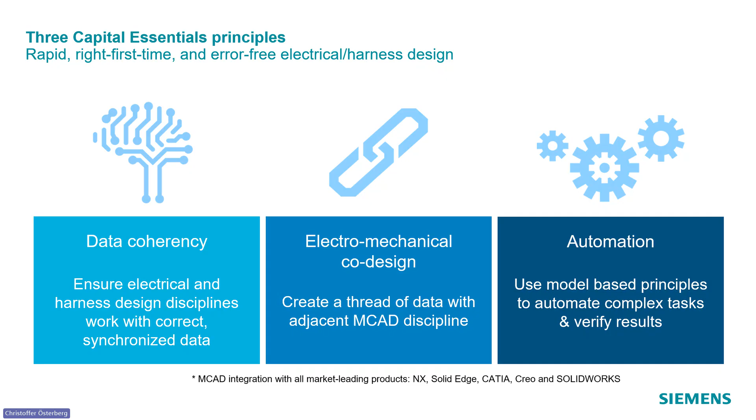And also, the digital environment allows you to automate certain tasks that you normally did manually. You can create a model to automate a large part of the design flow.

You can already start synchronizing this to the MCAD environment, transferring the data there. You can also sync this to the harness design. So these three parts are really working in parallel.

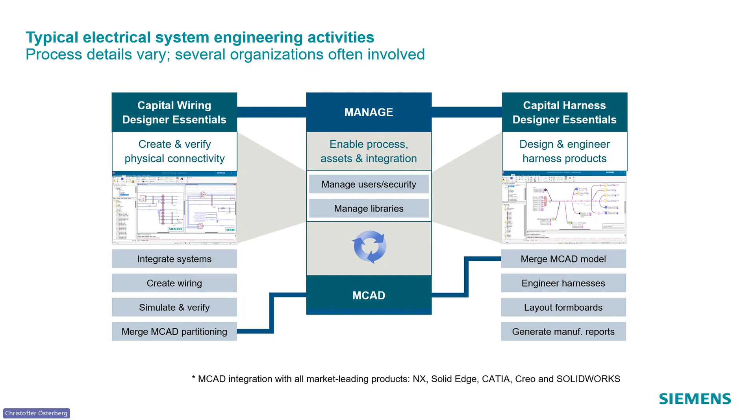The good thing is you can start with a rough estimate of how the design will look, and you can already synchronize it through the 3D design. Here you also add wires, splices and cables.

While you're doing this design, you can perform a simulation of the design. You can see, for example, voltage drops and how the current flows. If you have a couple of switches, you can see what happens if you toggle the switch in different positions.

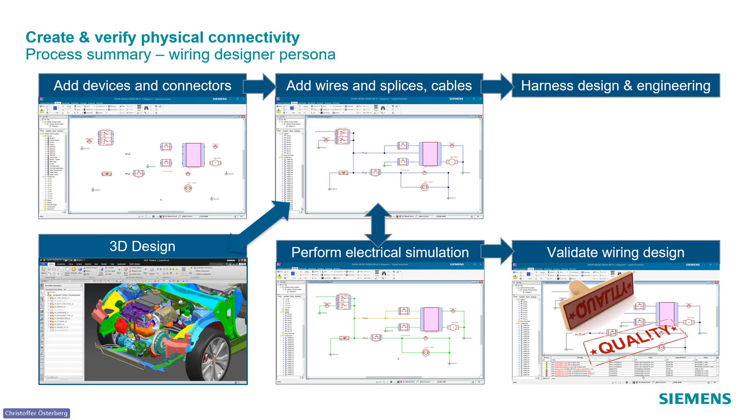Then you can verify this design and go over to the right side. If you saw the earlier presentation, on the right side you have the harness design. Then you go over to this part, and continue with synchronizing to the 3D design.

You send the data from the harness design, and you can have the exact correct bundle sizes in the 3D design, so you can see if there is enough space. You can, for example, set a value of the maximum bend radius and so on, so you can see exactly how it will look in real life in the 3D environment.

You can, of course, add protections and so on in the 3D design and synchronize it back to the harness design, and it will show up on the 2D design.

You can create the topology in the harness design by drawing the bundles, or do a flattening from the 3D design and place it in the 2D environment in Capital. And here you also have a verification stage with a design rule check, which checks that you have all the terminals in place and that everything is connected properly.

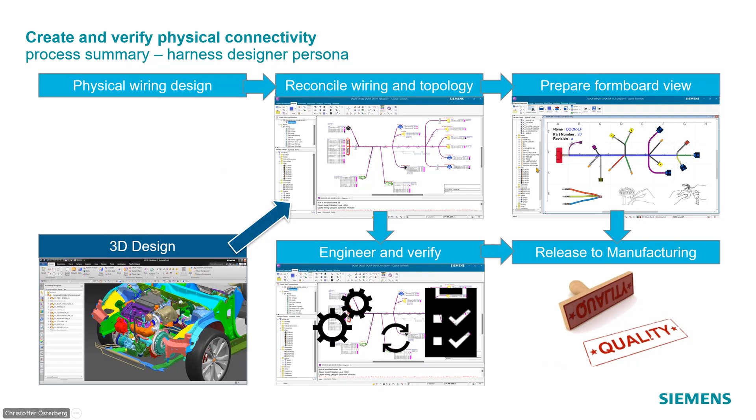You can also transfer, place for example protections and tapes in the 3D environment if you like, and transfer it to the form board design. Or you can place it in the form board design and transfer it back to the MCAD design.

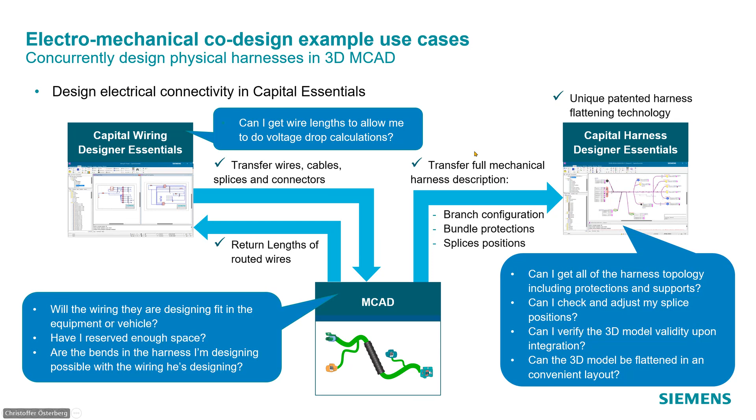I would also like to mention that we have integration with different PLM systems, the most common ones, and also the MCAD environment. So here we can handle the bill of materials.

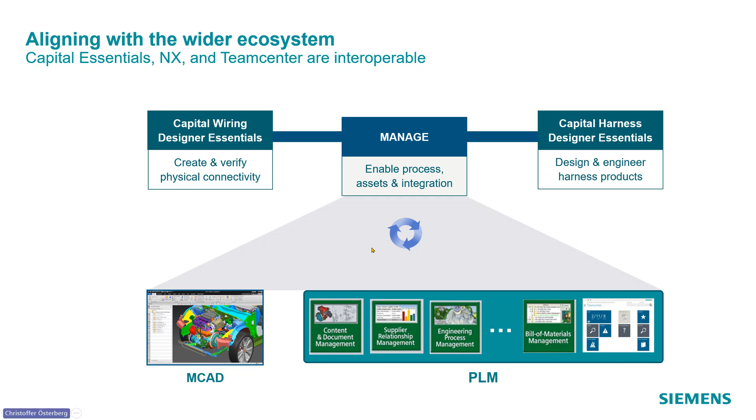Like I mentioned at the start of the webinar, there are two versions of Capital. Capital is the bigger brother of Capital Essentials, but it's a good way to start with Capital Essentials to evaluate if this is something for you. You still have the integrations with the CAD environment, including the most common MCAD tools.

So then I will start with a short demo. It's really hard to show everything because we have limited time, but I will show you a simple example of how it works when you synchronize between, in this case, the harness and schematic part. So let's start with the schematic design, and this is the environment.

When you start, I've already created a project. I call it Webinar January 2026, and then you will end up in this. This is how it looks, and here you have most of the functionality.

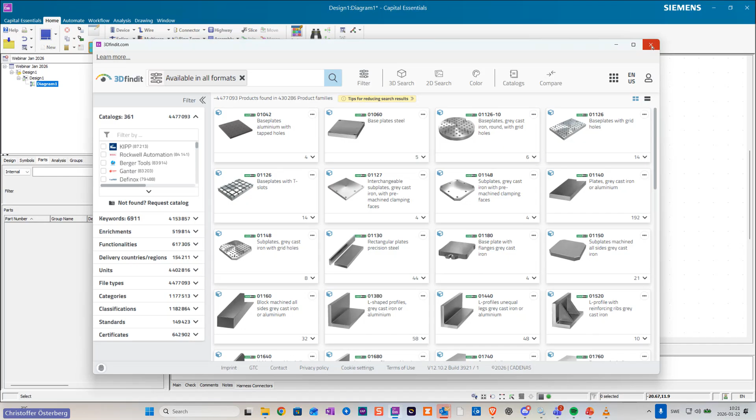So here you can download all kinds of different components that you can use in your design. And if you don't find it, you can always create it from scratch in the database. But I will start with a simple design.

I know I have 3 devices in my design. I just create 3 devices. I don't know yet what the devices will be.

Or maybe I do know - in this case, I know this should be an ECU. So I can search for it here. I know the name, so now it's an ECU. And if you click this button here, you can go to the database and see everything, every data from this particular component.

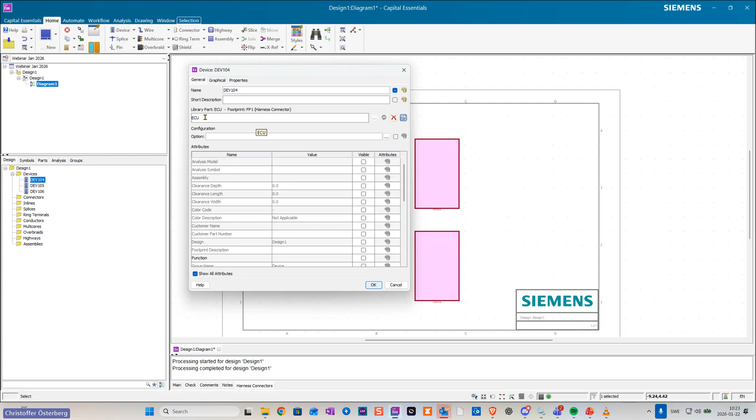You just fill in these tabs. For example, in this case, you have a footprint, and you have a connector specified that is compatible with this - you should use this with this ECU. So if I choose this ECU here, now it's a real component.

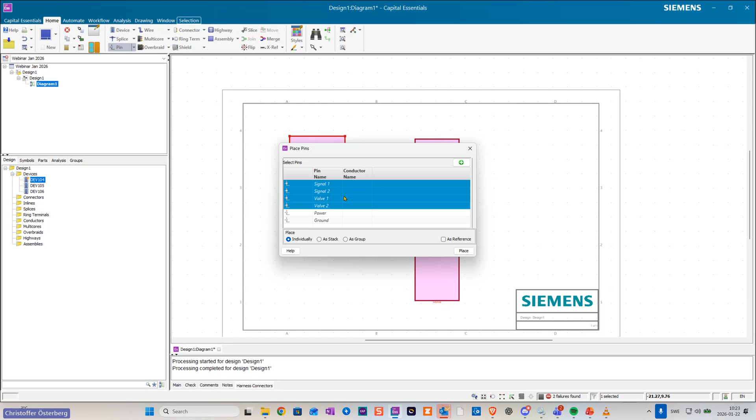And also, if I want to create a connector, I can just click this button. Now it's specified in such a way that it knows exactly what connector is compatible with this ECU. I know for a fact that I will use four pins, so I will exclude power and ground here. I would place this in my design like this.

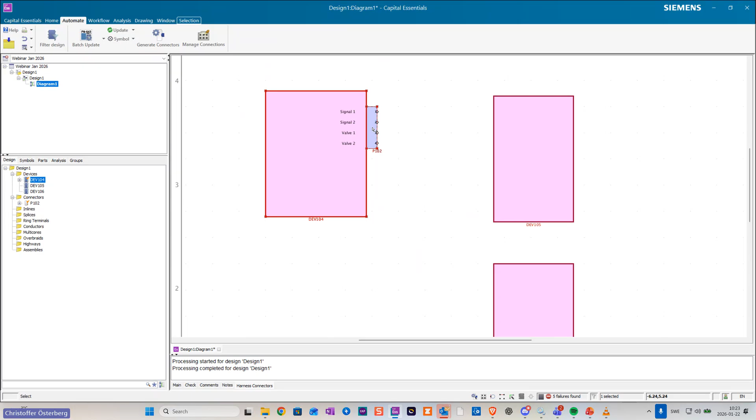Then I have the automate tab. Now I can generate the connector from this, so this will automatically create the connector compatible with this specific ECU. So if I double click on this, I can see what connector you have here, and I can also go into the database and look at the connector.

So I will continue with this device here. I know this is a sensor. I can either go and write it here, sensor, or I can go in and search for it - for example, sensor 0101.

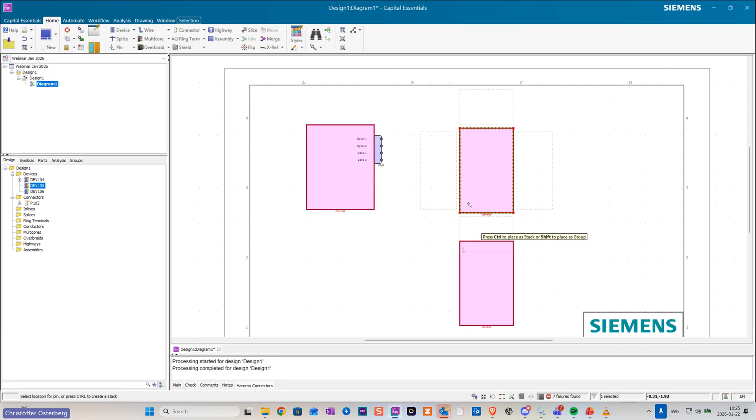Then I will go and place the pins. This is also specified in such a way that we have a connector compatible with it. I will use 2 pins, and I will automatically generate the connector.

For this design here, maybe I don't know yet which device I would like to use. So I can leave it as it is - I can still synchronize with the 3D design, and I can use this default device, and I can create a connector here. I know this connector will have 2 pins.

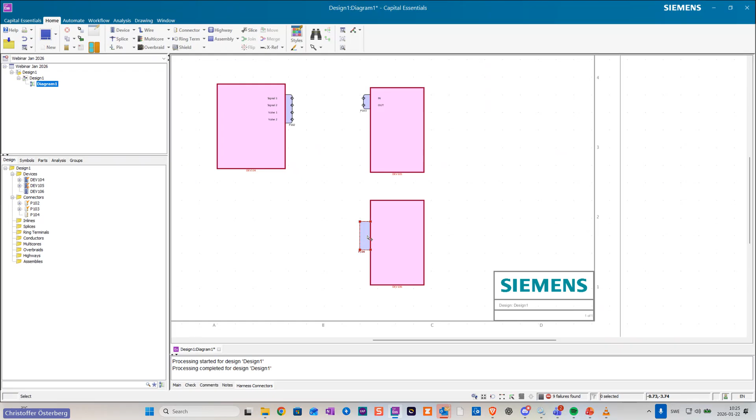Pin 1. And pin 2. And then it's time to wire this design up.

I will add a multi-core from the library. I can either go and search for it here in the field, or I can go and add restrictions if you're looking for something with a number of cavities or something like that. I can specify it here. In this case, I know the exact multi-core.

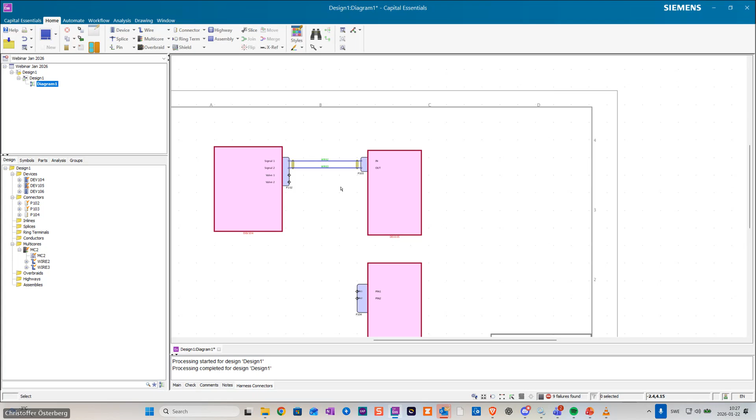Now I will continue with routing a wire between these 2 devices. I will also here go into the database. Here I can filter. I know I would like to use a PVC wire. I can search for it. I can search for it here.

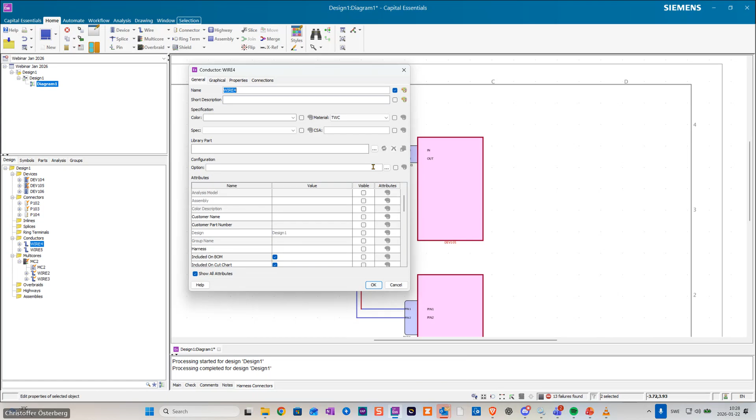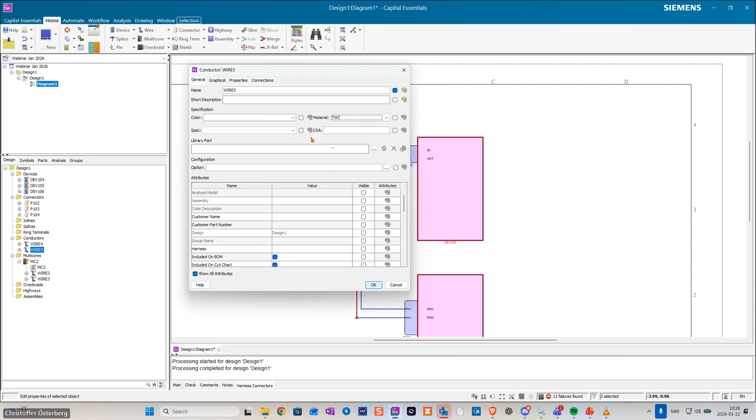Then it will show all the TWC wires here, and I can, of course, nail it down to different colors and everything. So I will choose a 1.5 wire. Material TWC. Another 1.5. So now I've specified real components here.

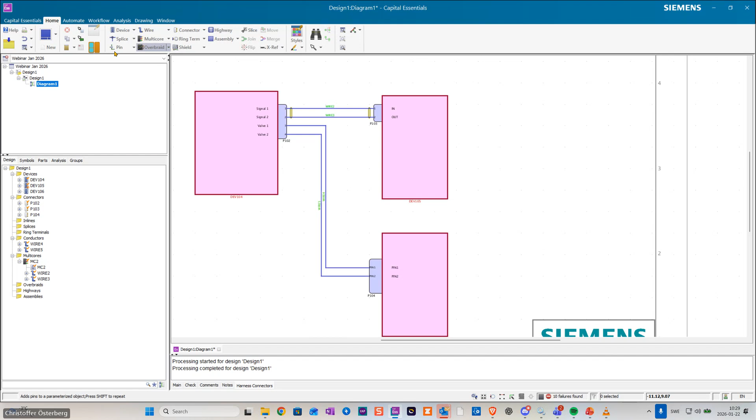Not everything. This part I don't know yet, which connector on which device. But I will start with creating a harness now. And then I will save my design. And then I will mark all the components that are involved in my harness, so the connectors and the wires. And that will add a harness attribute. I will call this H1, harness 1.

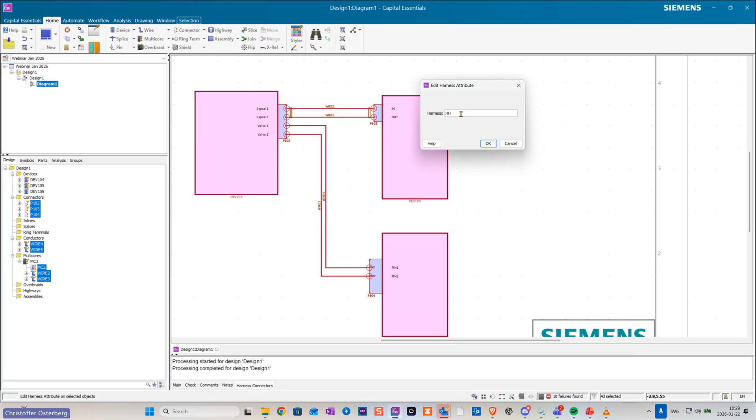Oh. I have some technical issues with the keyboard right now. H1, there you go.

And now it's time to go forward and create my harness design. So I will create a new harness design. I can name this design H1 so it knows which harness contains the data from H1. I also have to give it a unique part number. I can just type something, 365. And then I will click OK.

Now I go over to harness design instead. Here I need to place the bundle, or I can have this topology from the 3D design. So I can do a flattening in the 3D design and place it on the 2D drawing. But since this is a simple harness, I know the bundles will go like this.

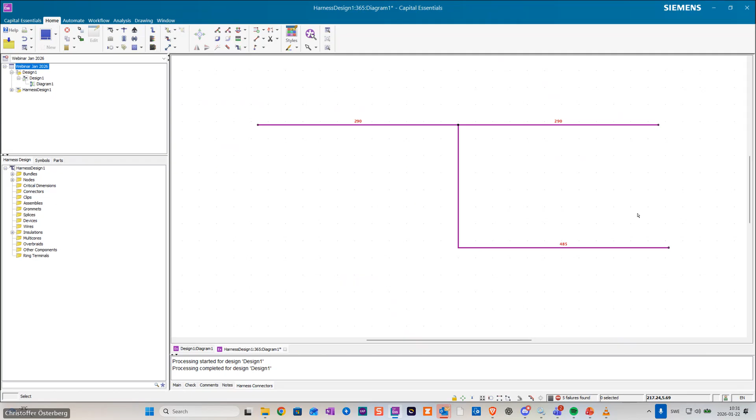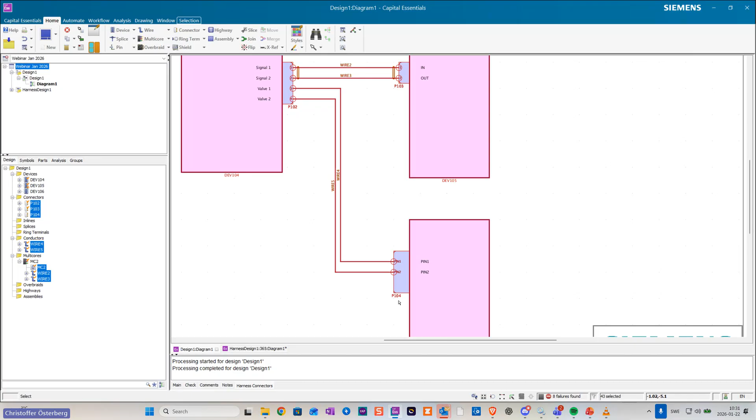So on this side you have the ECU, on this side you have the sensor, and on this side you have this device that I don't know exactly what to use. If the connectors should end up in the correct places, I will have to name the nodes in the harness design to P1, P102, P103, and then P104. I will name this to P102. P100.

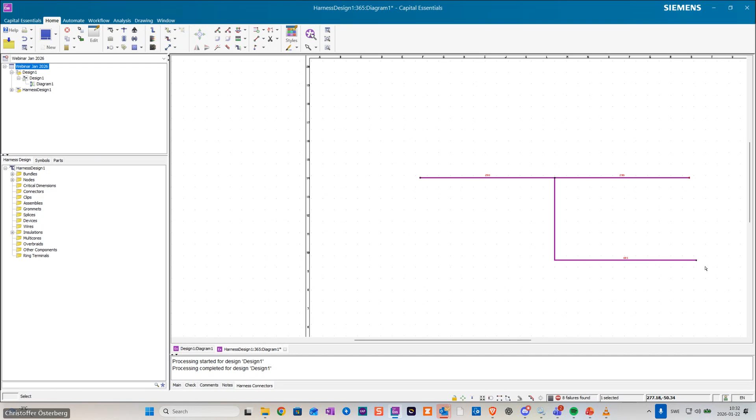Something wrong with the keyboard. I'm really sorry.

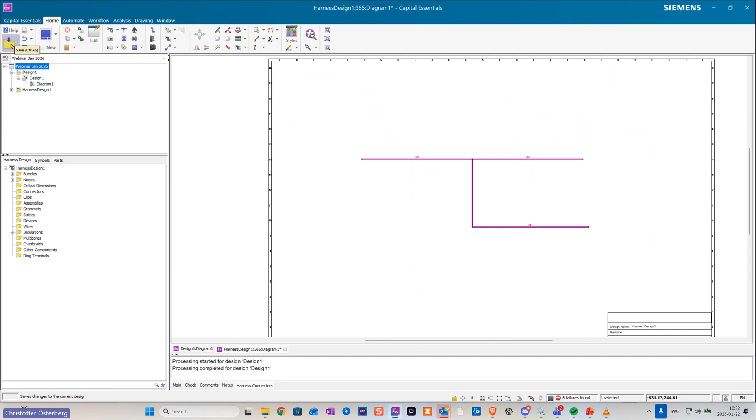Now the nodes are the correct ones. So I will save this. These are my bundles. I will now go over to this and save and close this schematic design. Now I will synchronize these designs. This is where the magic happens.

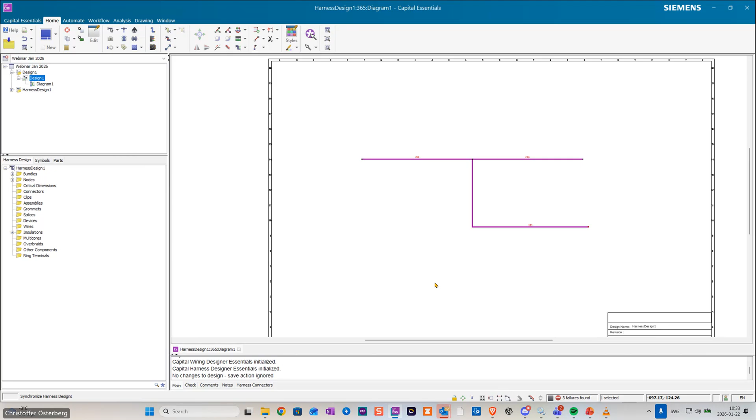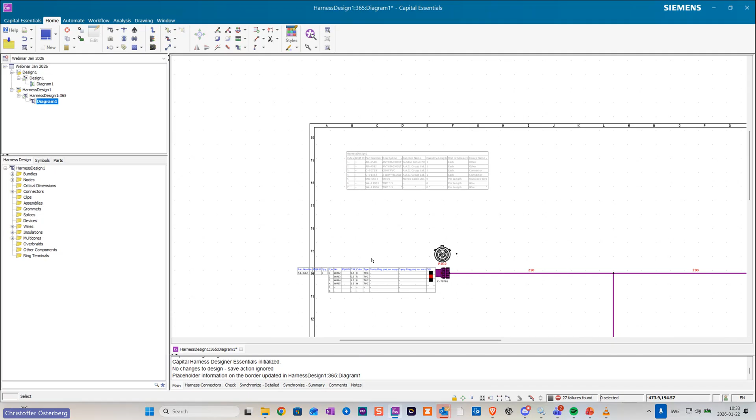Now I have my harness on the harness part here. You can see that you have the connectors here. You can see that you have a table over here with the components. I have the different wirings here. And this is where you can start to automate certain things, like you have this automate tab in the harness design.

So here you can start with calculating multicore lengths and so on, depending on which wirings you're using from the schematic design. Now it calculates the correct lengths. If you go into the bundle size here, you don't have a width yet. Then you can calculate the bundle sizes automatically.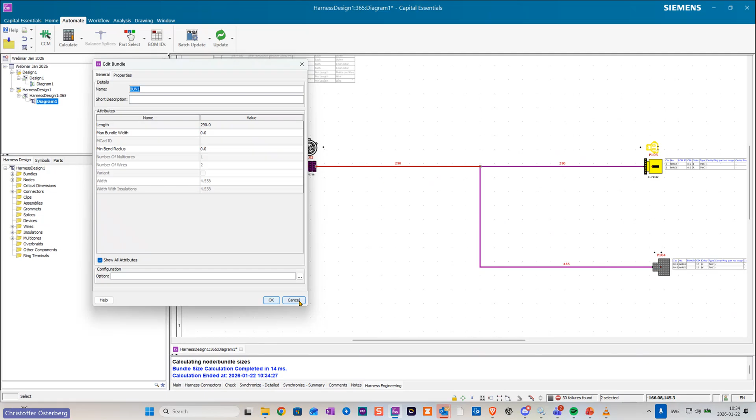And then you have a width, and of course you synchronize this to the 3D design, and it will show up in the 3D design. So the branches get bigger and take more space in the 3D design. And you have also only specified the connectors.

But like I told you, in these connectors you have certain terminals that are only compatible with this connector. So you can't choose the wrong terminals with the wrong connector. This checks everything, and you can't choose the wrong wire size that is not compatible with the connector or the terminal. So that should be impossible.

And then you can populate this terminal: you press this button here, and it automatically shows us the right terminal for this connector. And it can also show if you want it plugged or sealed and everything. Then it shows another terminal, but I will apply this.

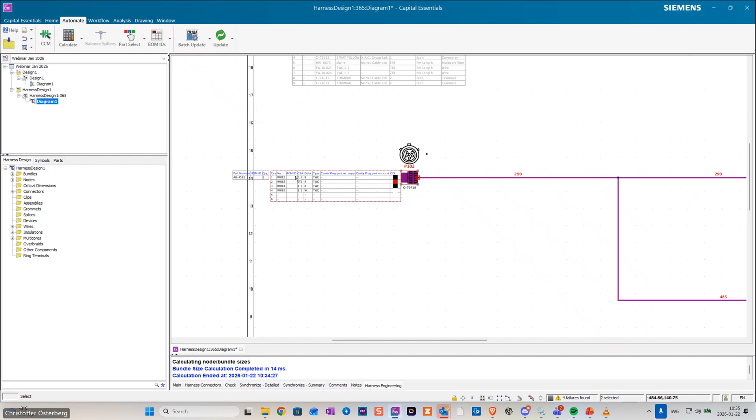Now I did it for only this connector. I can apply it for all the cavity components. And you see the table was getting bigger now because you have the terminals now. You didn't have that before in the design.

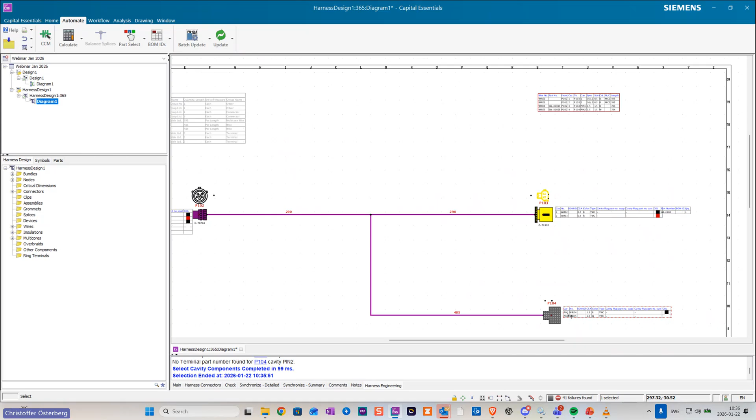And of course, this was a real component, and this connector was a real component. But as you see, you haven't chosen the connector yet in the schematic design, but it shows the default symbol here. So you can still work with it and synchronize it to the 3D design if you haven't been able to choose the correct connector yet.

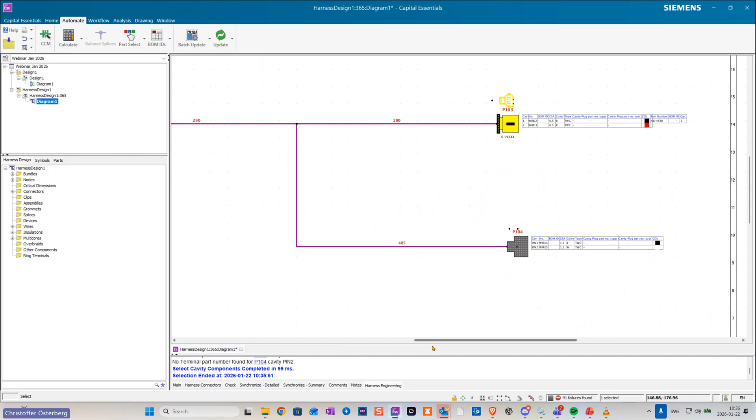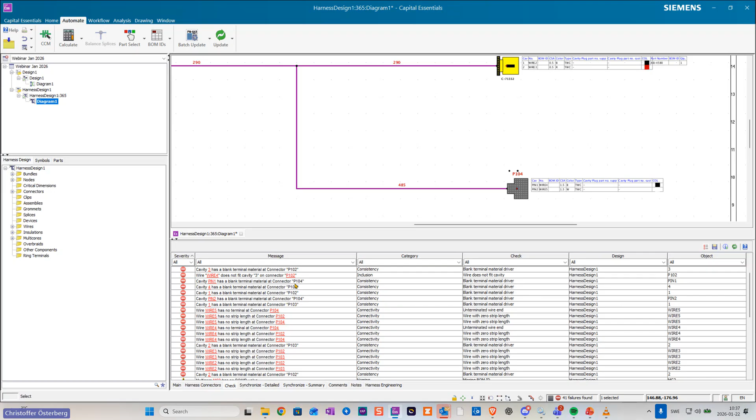So yeah, and also I should show you that you have this. Of course, this is kind of an immature design yet, but you have this check down here, and you can have it running in the background, the DRC, design rule check, and here, of course, this is an error, and before you release it, you can go step by step through all this and solve it, because it says, for example, cavity 3 has a blank terminal here, and you can click on this and you can fix it, and then you can go through the whole design and fix everything before you release it.

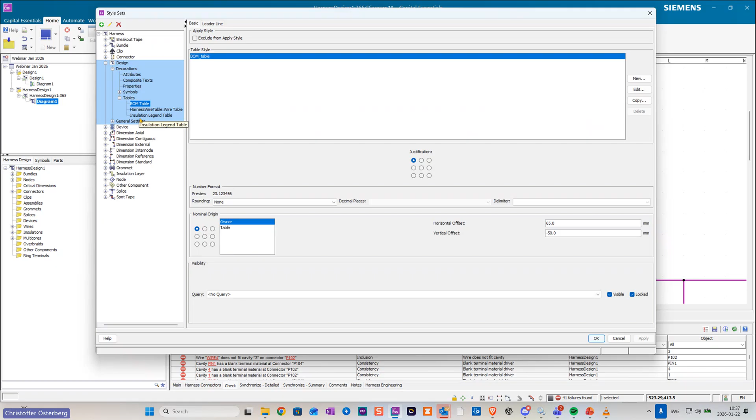I should also show you a little bit about, for example, styles. You can have different styles on the table. So if you choose the table here, you can have different styles, what data you would like to have in the table. And this also goes for styling. If you want a side view here, if you want to place it down below the connector or something, you can also fix this with styling and edit it like you want, and what data should be in the tables and so on.

And also you can create different reports depending on what the supplier wants. You can create your own report, or you can choose already defined, or in this case, you would like to have a wire list, for example. And then you have the wire list that's there, and you can save it in different formats and so on, export it, and you can create the PDF and print it. But you can also build your own reports if you want the specific information from there.

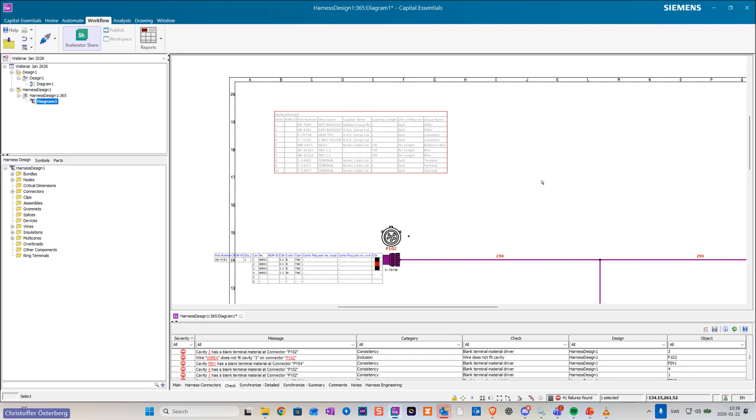So this was a short presentation of a really simple harness. And like I said, it's really hard to show you all the functionality in what is it, 40 minutes or so. So if it's needed, if you want to, we can create a harness from your harnesses that you are designing today. It's no problem.

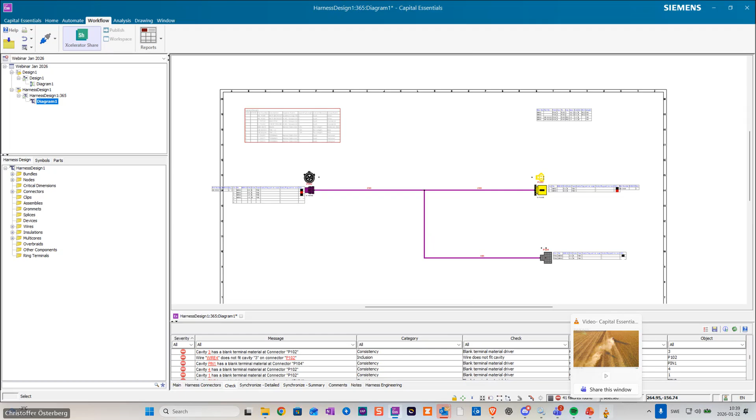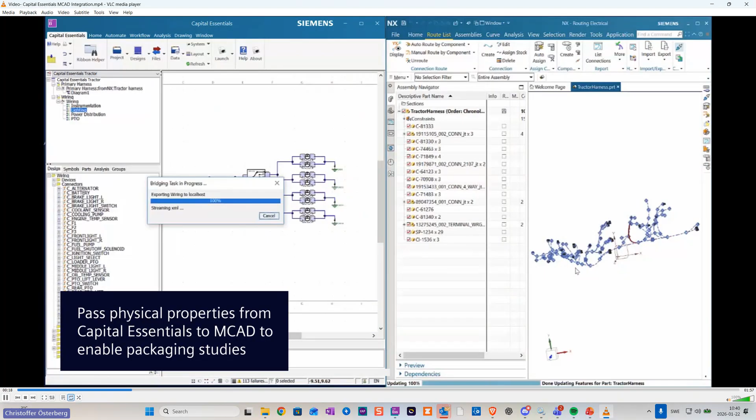Now I will actually show you, because I haven't showed you yet, the integration with the MCAD. I will do this by showing a short video that shows the integration with the MCAD environment. I will start the video here. This means, of course, the electric and MCAD guy can work together simultaneously in parallel. You can transfer the data back and forth. So here you export the data to the 3D environment, update the harness in the 3D environment.

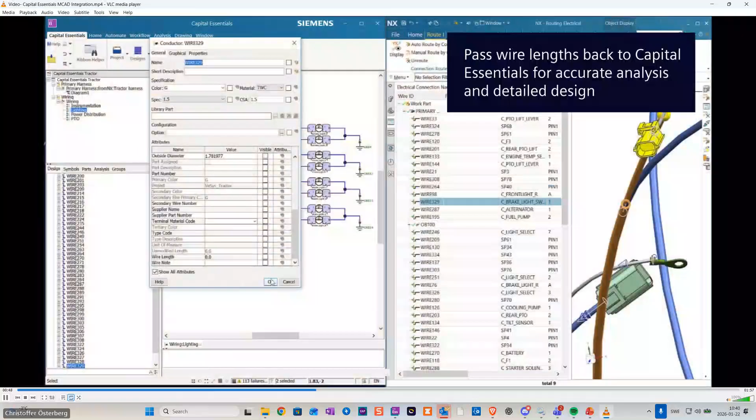And then you update the 3D design and send it back to Capital again. So both guys have the latest data. So here you can transfer, for example, you will update the lengths back to Capital from the 3D design. Now you have the new lengths.

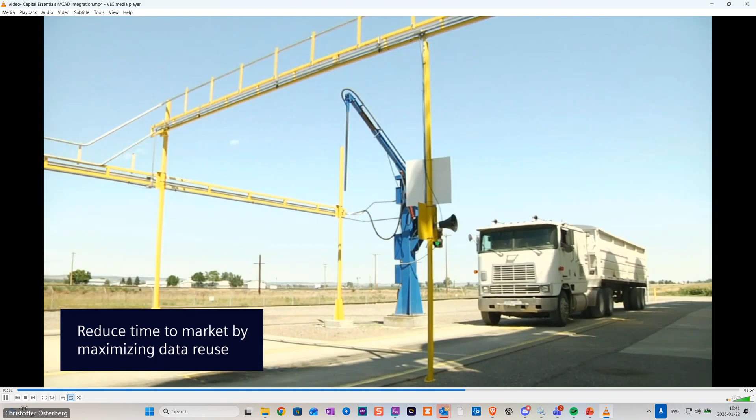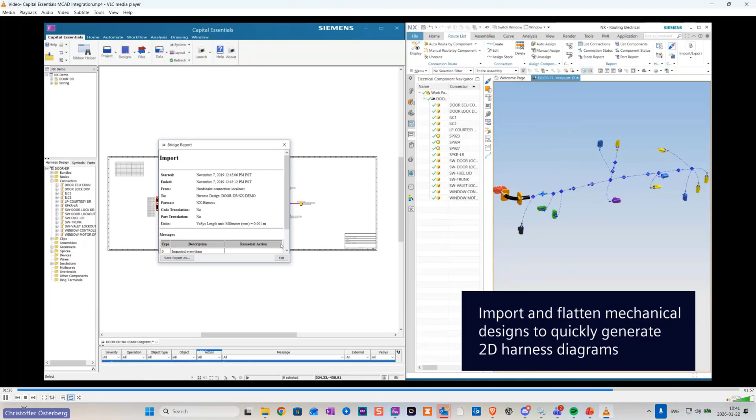And here you do the flattening from the 3D design. You have routed all the bundles in the 3D design. You do a flattening of the bundles, and you can have this as a layout for your form board. And it's compatible, as you saw, with NX CAD and SolidWorks and so on.

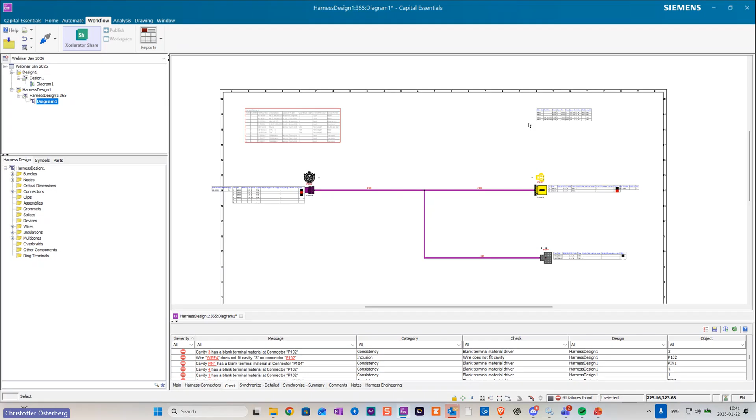Okay, so good morning, everybody. Today I will talk about our solution for fluid design, and in particular, I will briefly introduce Capital, which is our main electrical engineering product, which is part of the Siemens Xcelerator environment, which is a portfolio where we offer solutions for multiple domains, not only electrical, but mechanical, electronics, simulation, et cetera.

So you have seen previously Capital Essentials, and as Christoffer said, Essentials is just the light version of Capital, with the same interface, but with less functionality. So as part of the tools in Capital, I will provide just a short overview of fluid capabilities for creating hydraulic, pneumatic or P&ID schematics in conjunction with electrical schematics.

So this solution offers a common and easy to use environment for fluid and electrical drawings by using an ISO 1219 or a P&ID symbol library, or you can create your own symbols yourself if you want. And we offer a configurable diagram look and feel to meet the specific ISO standards.

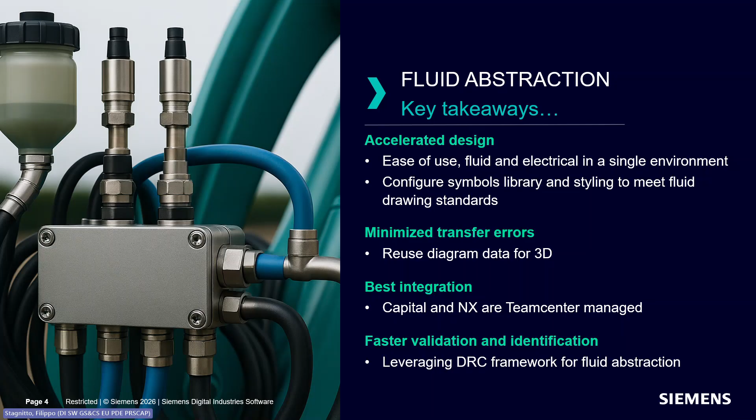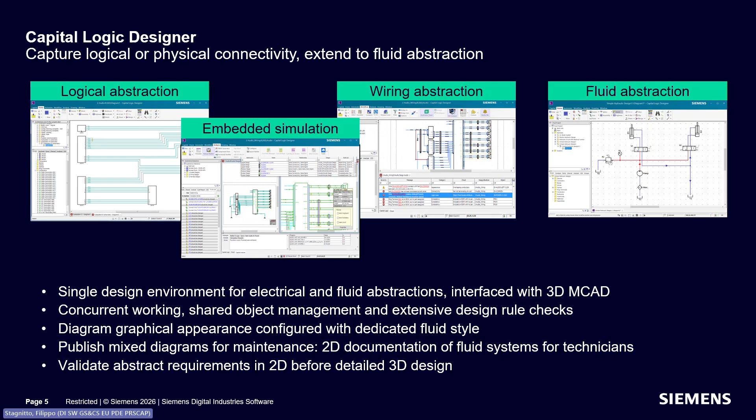Capital Logic Designer is the product, so it's the name of the product, which is the schematic entry tool for creating different types of design. We call them abstractions. So electrical and hydraulic are the drawings that we can create, and we have several capabilities, of course, for electrical engineering. But just consider that an electrical schematic or a hydraulic schematic can be consumed by, for example, a service technician.

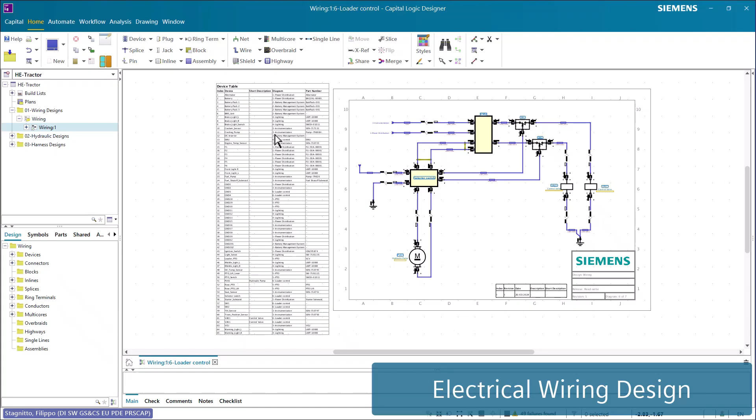And now let's see the tool in action. So I will run this small video demo, and what you will see in this demo are different use cases. Not all, of course, because we have limited time. So the first one is just how to navigate across the different abstractions. What you see here is an electrical wiring design with the full capability, so with the full icons on the ribbon.

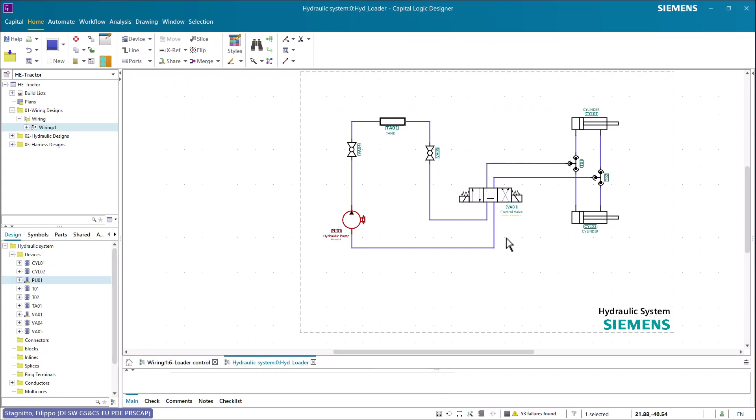And then starting from this electro pump, which is a motor, we can navigate to the hydraulic design. And so we can jump from one design to another design. We see here the ribbon is limited, just to draw these different hydraulic schematics. But we can do the same if we go from the hydraulic into the wiring design instead. And here we see that we are coming back to where this component is placed in the wiring.

The second use case is, let's see very quickly how to create a simple schematic. So we start first of all to create the drawing. And when we create this drawing, we have the ability to define which kind of drawing we want to create, which abstraction, which is hydraulic. And when we select hydraulic, automatically the styling is selected. The style set will drive you, for example, to automatically place a border, but anytime you can change the border. And now you're ready to start placing your components in the drawing.

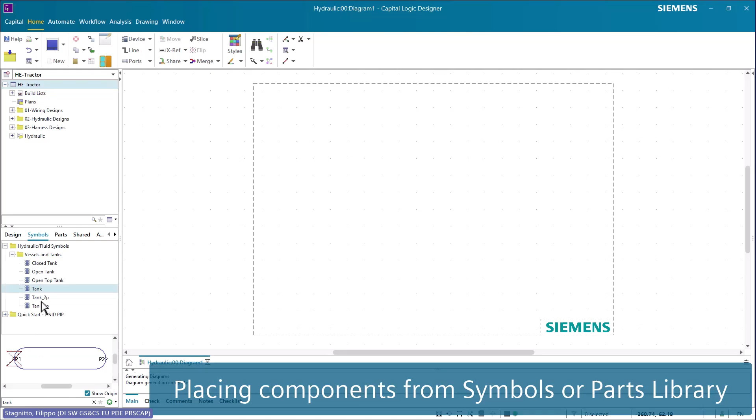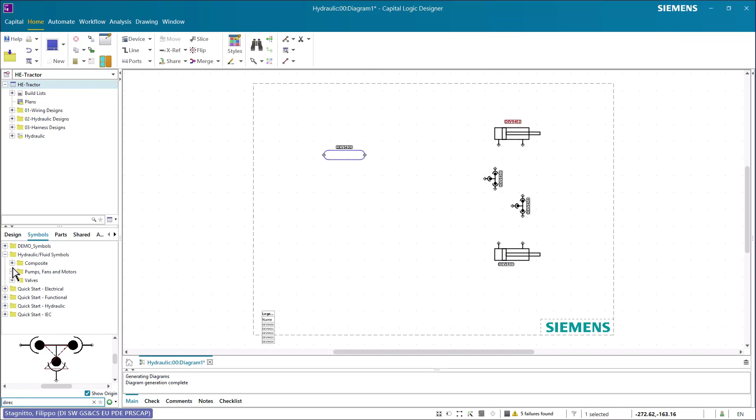To place the component, you go into the symbol library and search for your symbol by name, for example, or just scroll down the library and place the component. When you place the component, you can adjust the rotation and the position. And you can place, if you want, all components at the same time. Alternatively, you can go in the library directly. When we select a library part in the library, you already have part numbers associated to those components. And then you place the graphic into the schematic in a similar way.

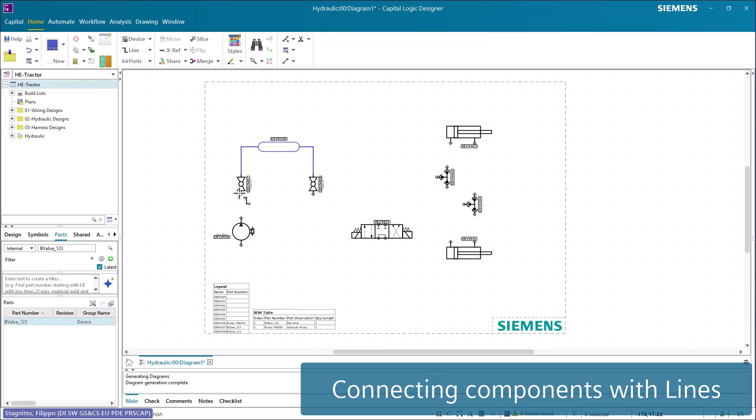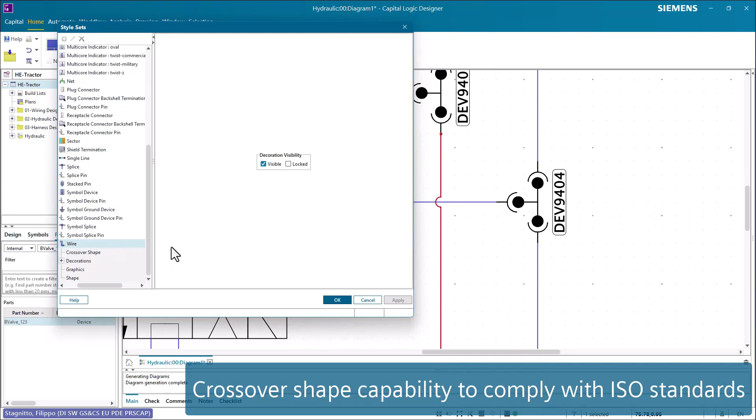The next step will be to connect those components with lines, easily, like Christopher did previously in Essentials, just to connect the pins in this very simple way. We have routing capability to automatically create and route the lines. Once this is done, you will see at the end that we also have the ability to control the crossover shape, and we can differentiate if we want a semicircle or a blank space, according to some specific ISO standard, for example, or we can change the distance on the blank space here.

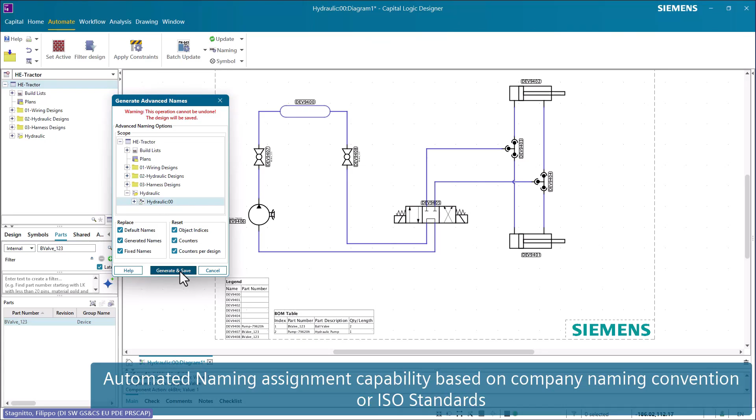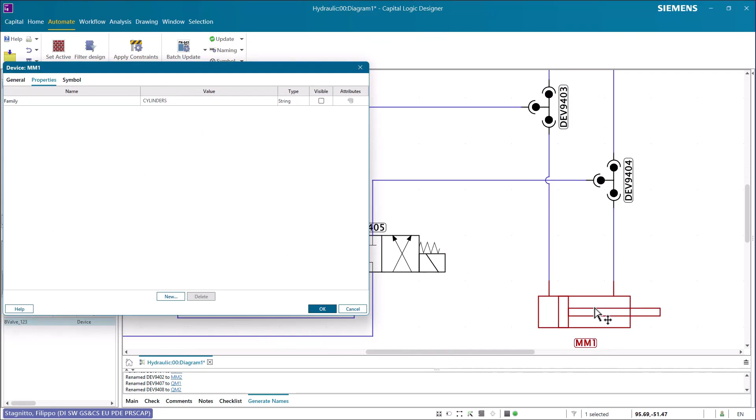Next use case is about naming convention. So in Capital, we have naming convention capabilities. Names are automatically associated to any component, but you have the possibility to automate a name based on specific naming conventions that you have in your organization or ISO standards, and we can generate names. In this example, for the valves, the name will start with the prefix QM plus a counter, which is automatically associated to the object based on a property. And the value of the property will drive the prefix. For example, for a cylinder it will be MM plus a counter, because the property value is a bit different.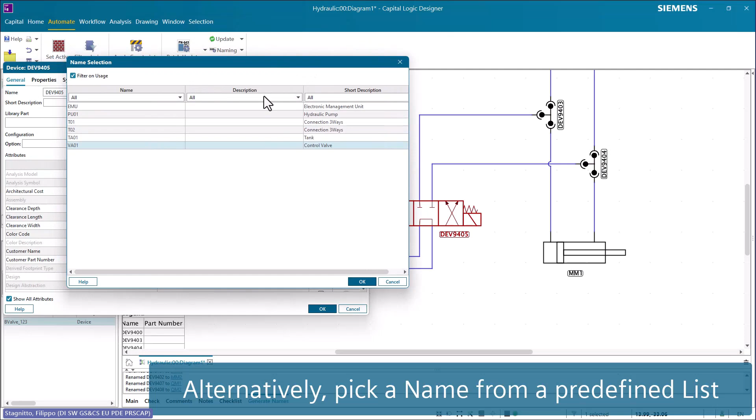Alternatively, if you don't have, like in this case, a property associated to the component, you can pick the name from a predefined list that you have created previously, and you can choose by description, for example, or directly by the name, if that's the one that you want to use. And then you see that the short description is also associated to the component according to the name. Just remember that the name must be unique, and the software ensures that when you run DRCs, for example. The tables are updated accordingly with this information.

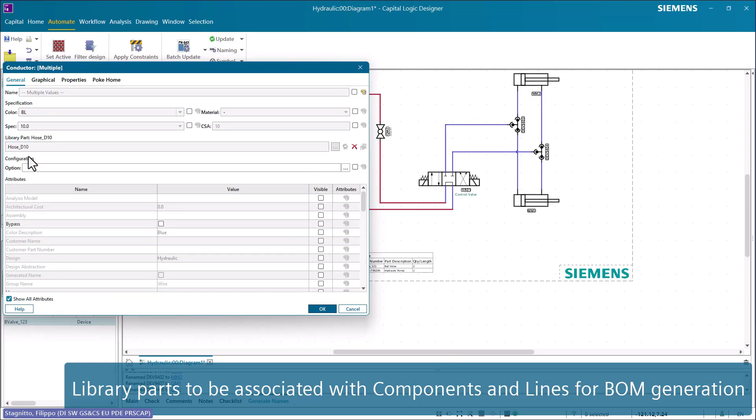Let's take a look at library association. If we want to associate part numbers, because we need to create a bill of materials, we can multi-select, in this case, lines. And then we can go to the library, to the database, and search for a specific part number. So for example, we want to associate a 10 millimeter hose to those lines. Perfect.

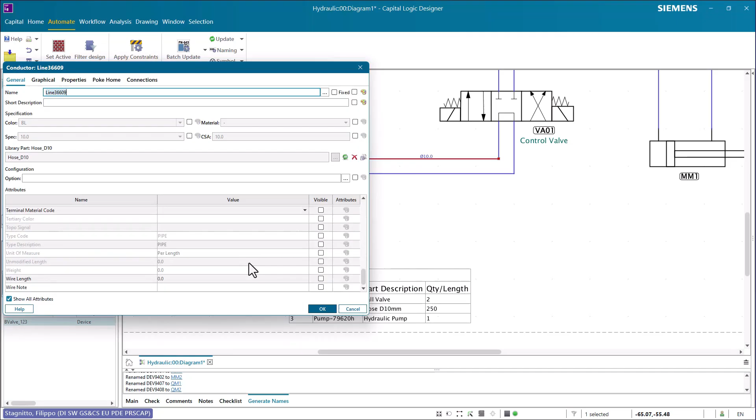All right, then the BOM is updated, and then maybe we want now to update the length of those lines, and you have two possibilities. You can do this manually. You can say, okay, I have maybe 250 millimeters of length for this hose, or you can use the 3D integration, the MCAD integration, and then the length will be automatically back annotated if you have a 3D integration. And then you see that the BOM table is now updated.

Another use case is the way to control line type. So we can differentiate, for example, lines per color or per shape. Instead of continuous, we can have a different shape. And we can use this by using specific parameters, specific properties. And we can say, for example, that we have a primary circuit and secondary circuit that maybe will have different colors or different shape for the lines.

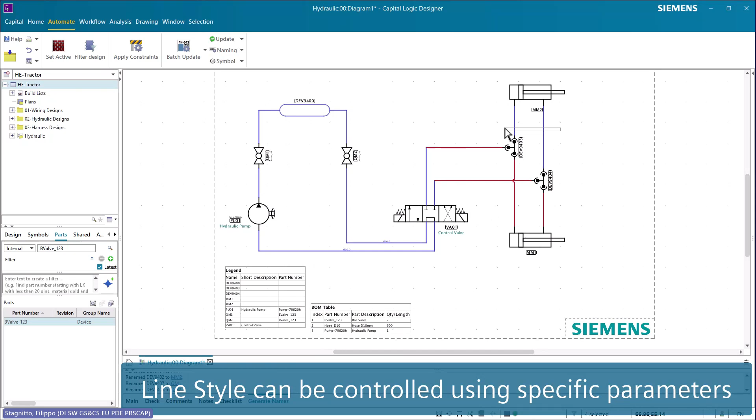In this example, I just used a different color for primary and secondary, and then when I apply the style set, the color will change automatically, and we will have green for primary and orange for secondary circuit.

The next use case is about option management. So we have the ability to have a 150% schematic and manage configuration. And what we have to do is just to assign an option code or create Boolean expressions to the components, to the objects. So it's, let's say, very simple in that way to associate option code.

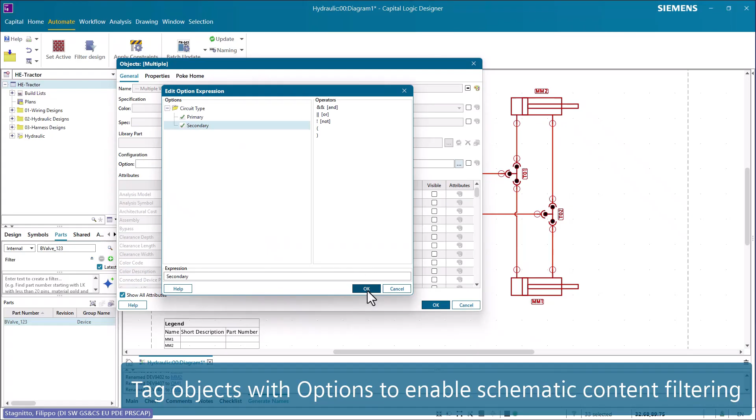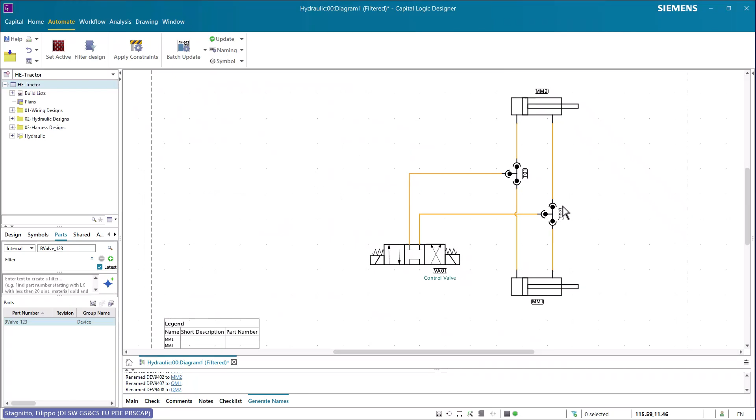And then what we can do is eventually filter out the content, and we can filter per option, or we can filter per configuration if we have created a configuration, so a set of options. And then you see that all the parts of the circuit which are not part of this configuration will be hidden. The same if we select, for example, secondary, and then the primary part will go away, and then we see only the secondary configuration.

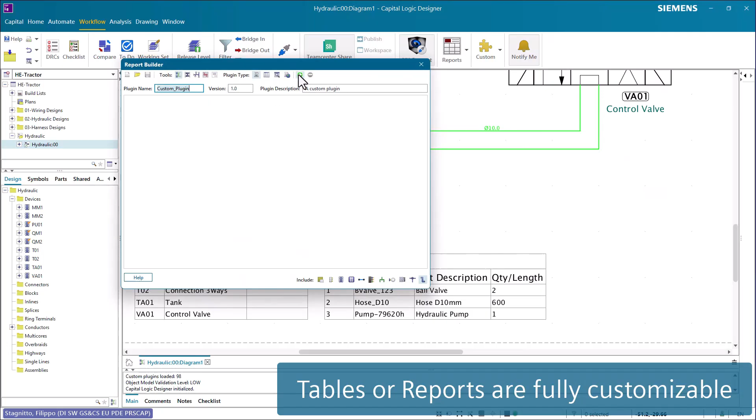Tables and reports. I think that we have already, let's say, talked about reports. So in Capital, we can visualize the table. The tables are automatically populated. And Christopher showed that we have the ability to create your own report if you want. Very, very simple. You can select which elements you want to visualize in the table, for which components, for example, and where you want to consume that table. So in a drawing, or if you want, eventually export the table outside the software, of course. And of course, then we have to save.

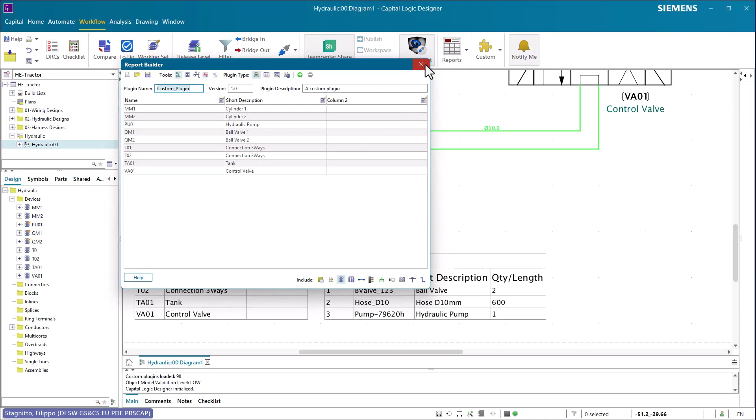If you want instead to visualize the report externally, you can select a bill of material or a legend, and then that report can be saved in Excel and can be consumed externally, I don't know, for a supply or for something else.

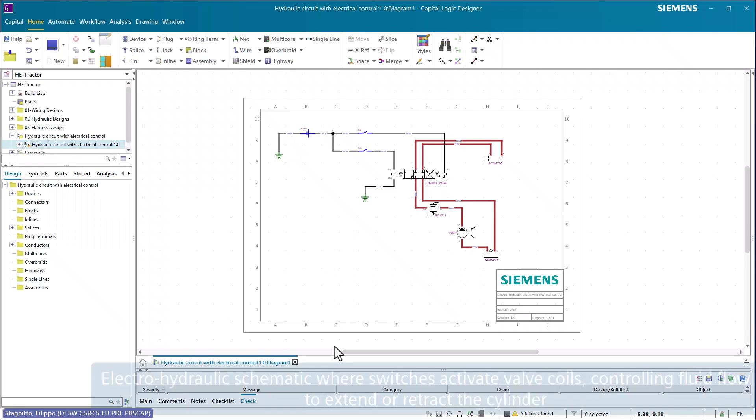And the last use case is about simulation. So in this use case, you will see, for example, how we can control, or we can showcase the fluid circulation in a simple schematic. When we start analysis, here we have, for example, a couple of switches to control the valve coils, and the valve coil will drive, will activate the cylinders.

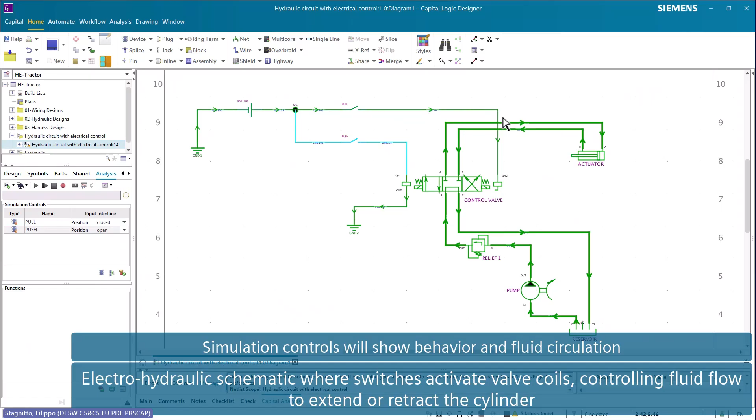So let's consider that we are going to close, for example, one of those buttons, the first one, the pull button. And then we see that the current will activate the coil on the right side. The flow will circulate in this direction, and then the movement of the cylinder will be in a pulling direction.

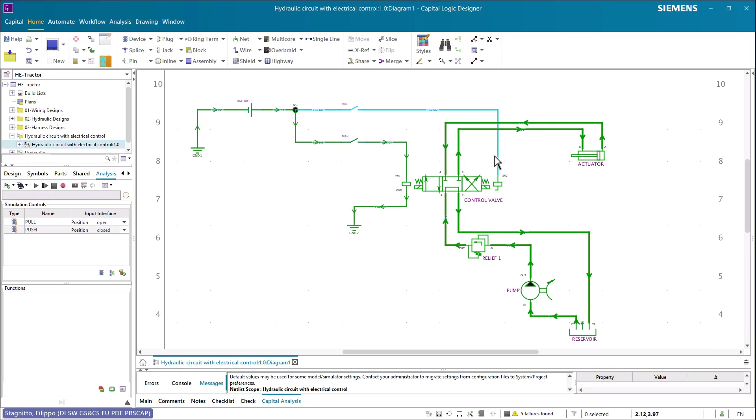And then in the opposite way, if we close the push button, this will activate the valve on the left side. The fluid will circulate in the opposite direction, and the movement of the cylinder will be pushing in that direction. So that's what we have in terms of analysis capabilities. And yes, this concludes my presentation and my demonstration.

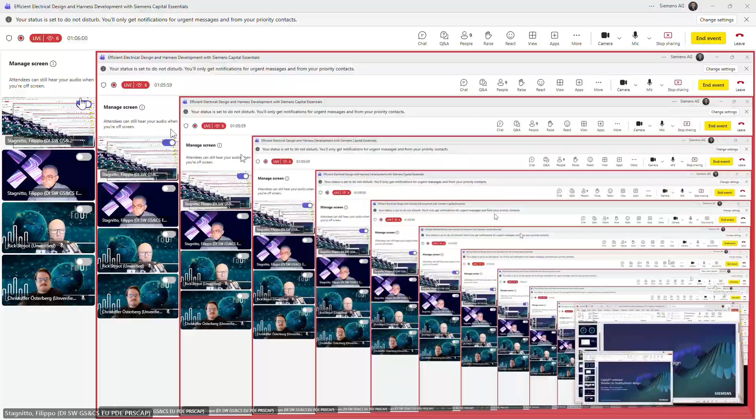Of course, there are a lot of similarities. For example, what Filippo showed here was the simulation. This you can do in Capital Essentials as well, not with hydraulics, of course, but electrics and all. The reports and everything are included in Capital Essentials as well. But of course, the hydraulics functionality is only available together with Capital.

So maybe we should go over to Rick now, because he has taken care of this. He's my colleague. He's sitting in Holland. I'm sitting in Jönköping in Sweden. And Rick is also working with cabling and harness. And he has taken care of some questions, hopefully. Yeah, I mean, people can still submit questions via the Q&A window.

I did get a question in, and I think Christoffer sort of already handled that, because Filippo has shown something which is specifically in our Capital environment. In the presentation, Christoffer already mentioned that we have actually two environments, Capital Essentials and Capital. And basically, people can move from Capital Essentials to Capital if they need more functionality. But one of the questions that came in is how easy is that, and what do you need to do?